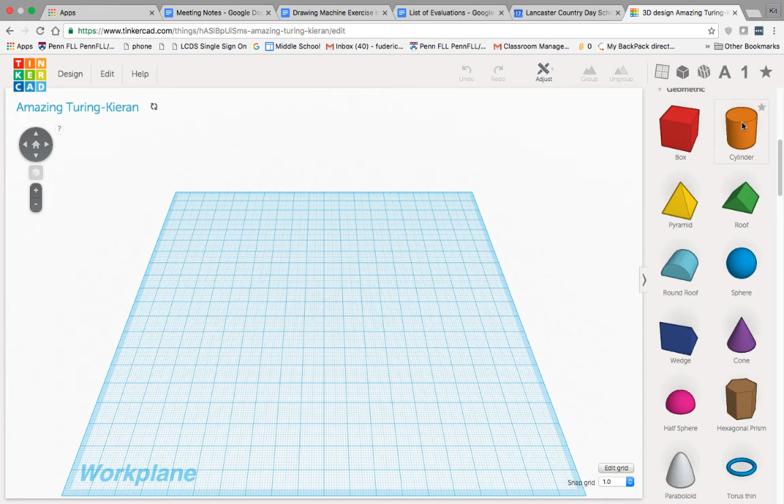So step one, we got to decide what kinds of shapes make up a cup. If we divide a cup into its components, specifically a mug, we could describe it as a cylindrical shape with a half circle extending out the side of it. That half circle is going to be the handle for our mug.

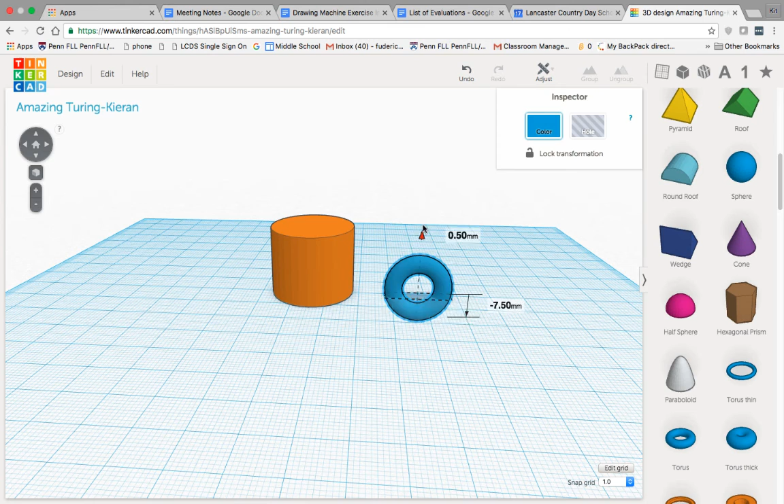So in order to create a mug, we're first going to create the dimensions of the cup itself. Then I'm going to orient the handle in a vertical position by right-clicking and orbiting to the side, selecting one of the three arrows, pressing and holding and moving it to a 90-degree position. Then I want to click on any part of the shape which is not one of these white boxes, or this arrow, which if I press and hold moves it up and down.

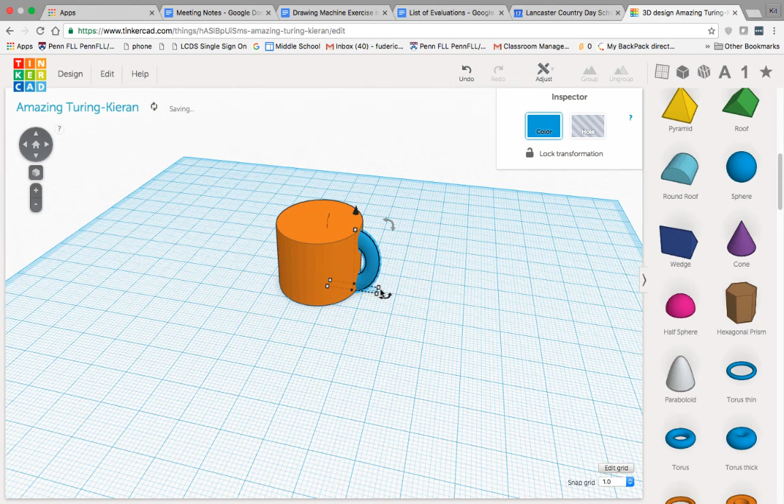I want to move this shape slightly into my cup and then raise it up to a point that I like. I'm then going to resize the object and continue moving it around till I get the form I like, and that's about good. You can spend a long time adjusting your form.

Then what I want to do is merge these two shapes together, and in order to do that I'm going to highlight everything and select group up in the top right. The mug is going to turn one solid color, meaning that when I click it I'll move everything around with it, as opposed to if I don't group it. If I back up till it's not grouped and try to move something, it moves the individual component itself. So I'll group it back together.

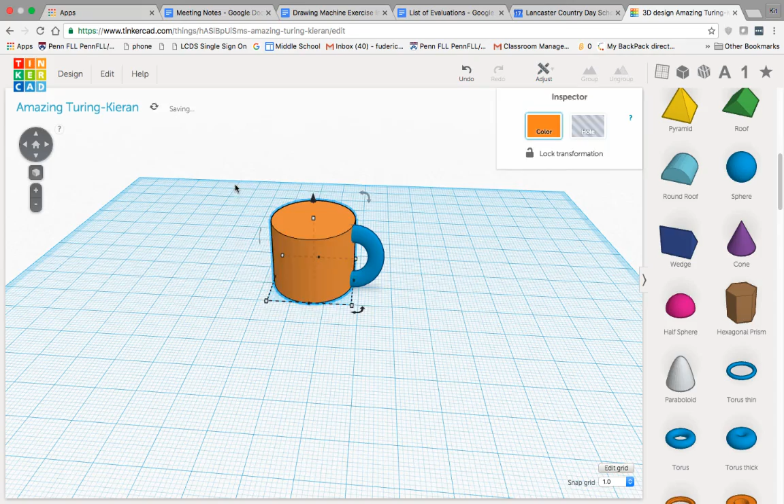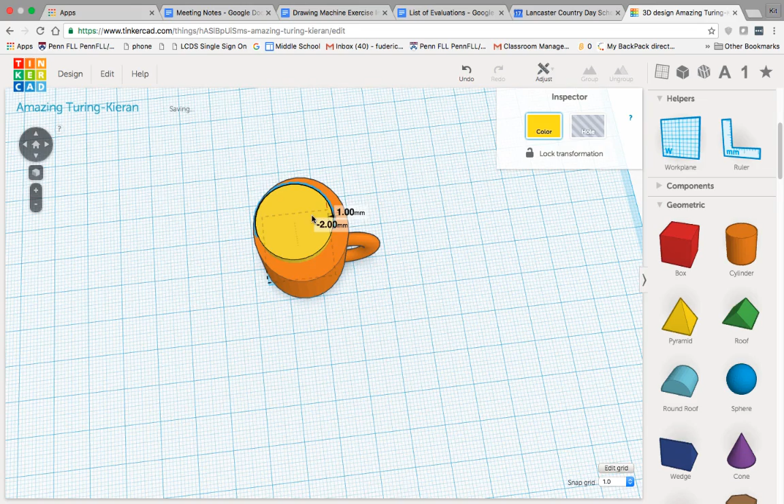What I then want to do is create the hole in my mug, and for that I'm going to drag in another cylindrical shape. I'm going to change its color to yellow so I can keep track of what I'm doing a little bit better. I'm going to move it into my mug and position it in an orientation where it will best represent what should be an open hole shape. What I then need to do is indicate to TinkerCAD that this is indeed a hole, a shape which should cut out its own form within the cup, by selecting the yellow shape and then hole. Notice how it becomes see-through.

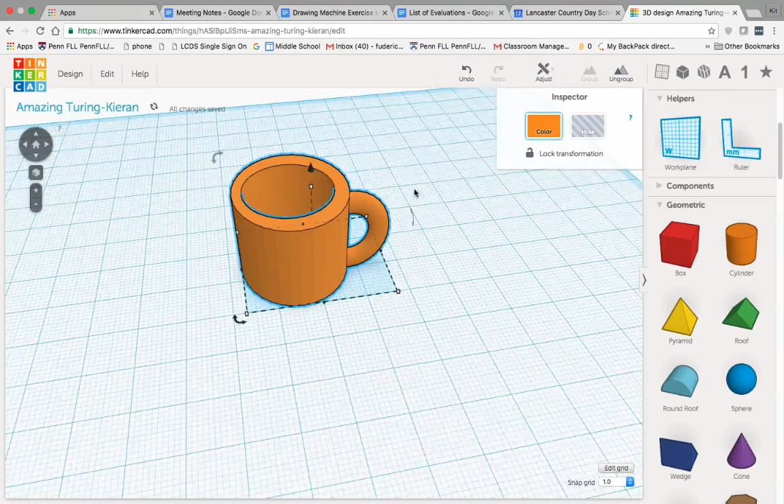I'm then going to highlight everything again and say group, and when it's finished saving you'll see that a hole appears. Alright, so now we're going to go ahead and put our name on our cup, and there's a pretty easy way to do this.

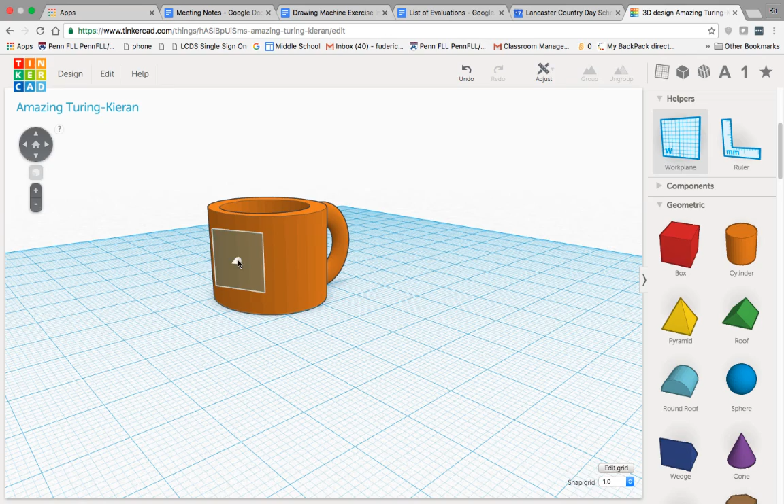The work plane, that's what we call this blue thing under our mug, is now in a horizontal position, but what we probably need to do is move it into a vertical orientation so we can write our name on the side of our cup. I'm scrolling in and out with the mouse wheel, and I'm going to click on the right toolbar and drag in the work plane and move it into a position where I'm expecting to lay down some letters. Just about there. What will happen now is every time I drag in a shape, it's automatically going to move onto the new work plane, which is vertical.

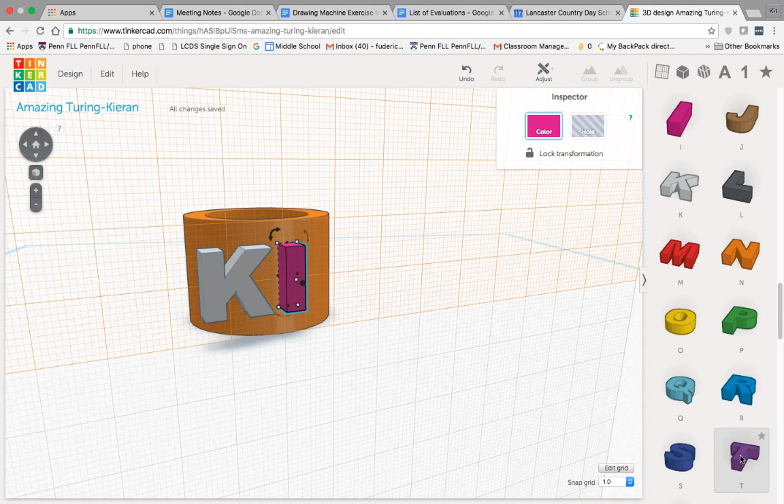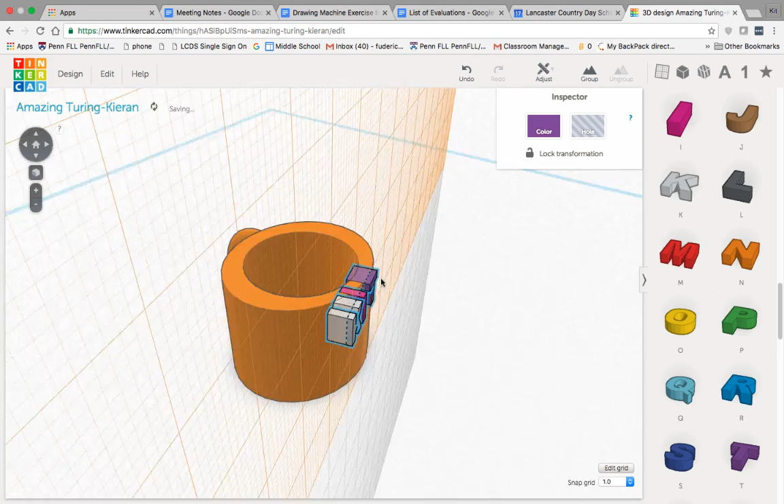And then I'm going to resize my name, then move it slightly to the side, and sink it in using the arrow, and also bring it down slightly. Now you'll notice that part of the letters are extending out into the hollow space, and this isn't what we want.

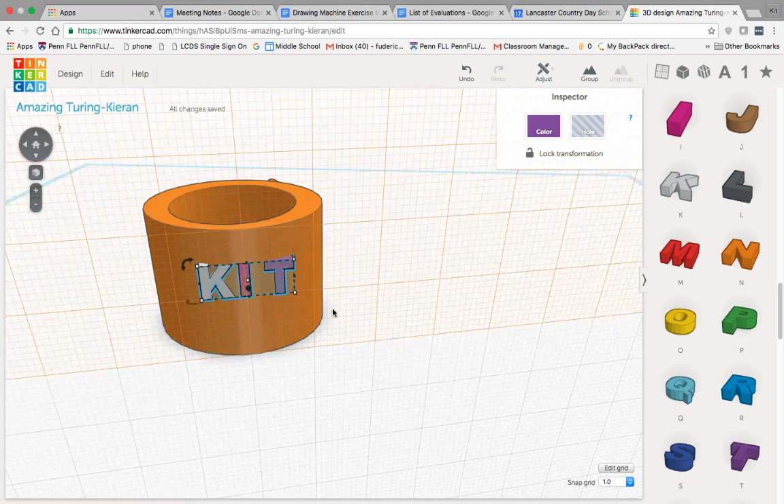So what I'm going to do is fix this right now. Now that the letters are in place, I'm going to move the work plane back to its original position, first by clicking the grid up in the top right, pressing and holding the work plane and moving it back to where it once was. I'm then going to highlight our mug.

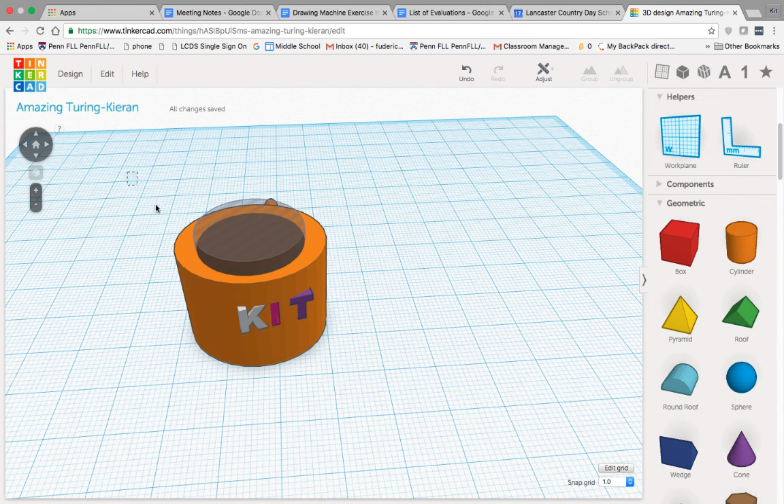I'm going to ungroup it so the whole shape is there again, and then highlight everything again, this time including the letters, and say group. What will happen is now when we look into the internal portion, the letters are no longer there, but you can see that the I is missing, so I'll select the mug once again and undo it.

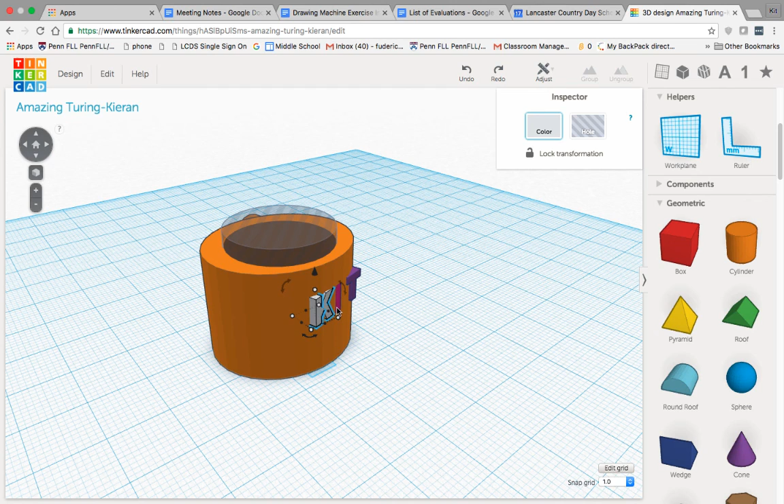I'm going to select the individual letters by clicking on the K, holding down Shift to select multiple things, and then move this slightly outside of the cup region. What I'm then going to do is highlight everything once again and group it. And there you go, there's my mug with my name on it.